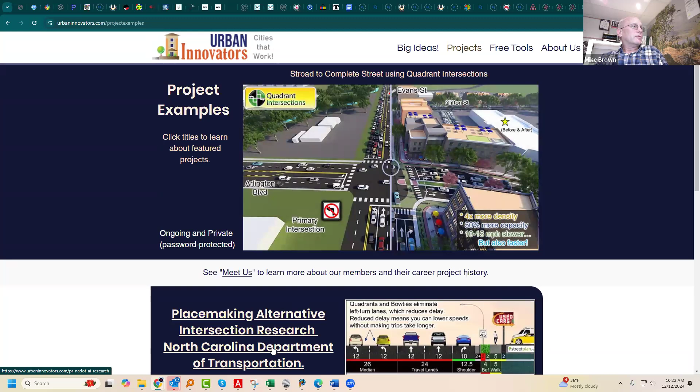Then I'll just carry on. I've got this stored on my website, urbaninnovators.com, and I'll just go there. If I click the projects button, we're going to be here. A lot of these graphics are here that we're going to talk about today. If you wanted to go there on your own, you can do that too. Go there, and then there's this North Carolina project, and on that main page, right there, that's the graphic I wanted to show.

The phrase we coined was drive slower, travel faster. The idea being that if you're Bugs Bunny there in that red car, you got a fast car, a fast speed limit, but if you hit so many red lights, are you really moving very fast? In urban environments, if the speed limit is 45, you're probably driving 50 if not faster when it's wide open, but then you reach the signal and your average speeds might drop down to 15 or 20, even in the peak congested periods.

So the alternative intersections are so efficient because they reduce the number of phases. You can see on the left there that a 3-phase signal just means turning off one of the left turn movements, and a 2-phase is turning off both of them in the main intersection. By doing that, you get more green time, and with more green time, you can afford to reduce the speed limit.

In the research we just did for you guys, we tested some cases - what if we dropped the speed limit from 45 to 30, a 15-mile-an-hour drop? We measured that the average speeds over like a half a mile distance, maybe even more, truly did come out faster. So after we recovered so much green time, the average speed had increased, even though the cruise speed had decreased by 15 miles an hour.

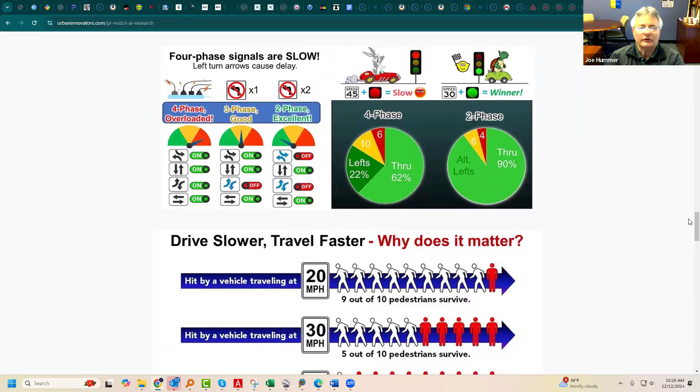Is it easy from this website here to show us a couple of the images of the particular designs? Yeah, I don't know which one you want to start with. First, maybe let's start with the U-turn if it's convenient for you. Yeah sure, so I'll go back to the top, and these 3 buttons here will get you to each of those.

But you know, most of us would think of U-turn in this state, we would call it an RCI, as a high-speed rural design. You need lots of space for the diameter of that U-turn. It's tough to find that kind of space, especially in the kind of stroad environment that you're talking about. So the main question to me is how do you end up fitting U-turns into urban areas? Yeah.

Well, it depends on how you think of finding space, I guess, because sure, the U-turn may not exist or be possible within the current right-of-way footprint. Suburban areas aren't like busy downtowns where the buildings are right up against the sidewalk. The buildings are usually 40 feet away from the sidewalk, maybe more. So you're going to impact private property usually when you try to identify where you're going to put a U-turn, but it's probably parking lots or landscaping or something like that.

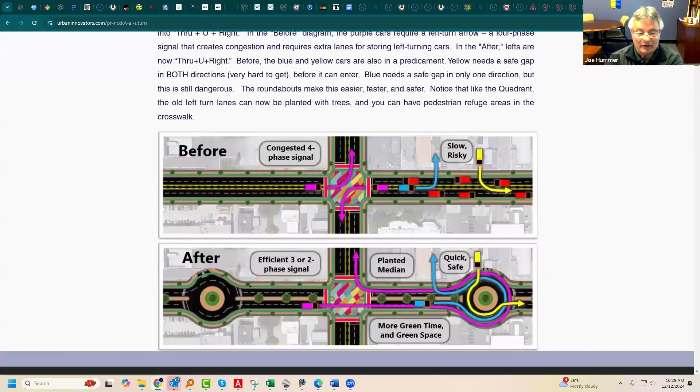Show us an image. What does that end up looking like? Sure. Well, there are so many different U-turn designs, and this first one just leverages roundabouts, and it's different because we think of roundabouts as being directly in an intersection, but they don't have to be. They can be off to the sides. And if they are off to the sides, then there's a lot of virtue that can happen.

So you see right there, the purple cars are requiring a dedicated phase, but with the roundabouts, you can reroute and get rid of that phase. You go through the intersection, make a U-turn, and make a right. That's basically the RCI or R-cut movement, but using a roundabout to do it.

What's cool about this is it's not only useful for the phase reduction, but it makes things safer for the blue car that otherwise has to take risky gaps, and the yellow car, which has to take even more risky gaps. Especially the yellow one. Yeah. So even if you didn't introduce these U-turns for the sake of improving left turn efficiency and getting rid of phases, doing this will make a raised median corridor a lot more navigable and a lot safer. So that alone is a good enough reason to do it.

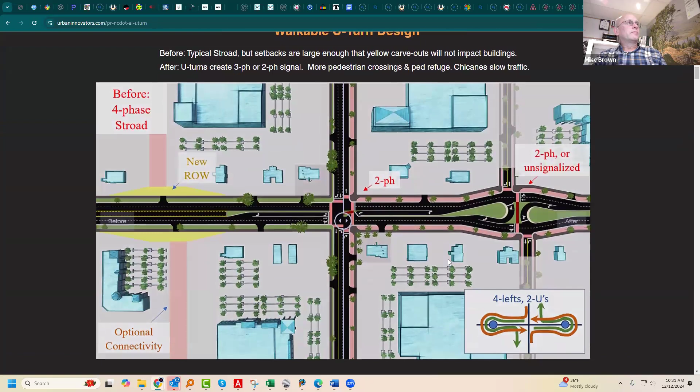So here's one that's a fun comparison. This is just looking at a typical stroad, east-west and north-south, kind of looks like a stroad, but it's meant to be a smaller connector. We just drew a really long right turn lane and a really long left turn lane, but it doesn't have to be like that. Just looking at it, this is how I spot for opportunities in stroad environments to do things like this. That yellow space is what I need to make this work.

And so when you roll that out, this is the design concept we came up with. This is a lot like the R-Cut, but instead of a typical loon design, it actually flares out the main lanes and creates a teardrop type of shape in the middle.

What's useful about that is it forces a slowdown on the main line. That's one of the good things about it. Another thing is it creates a rather large pedestrian island there, giving you a two-stage crossing that's really pretty convenient. I think that's a very helpful thing.

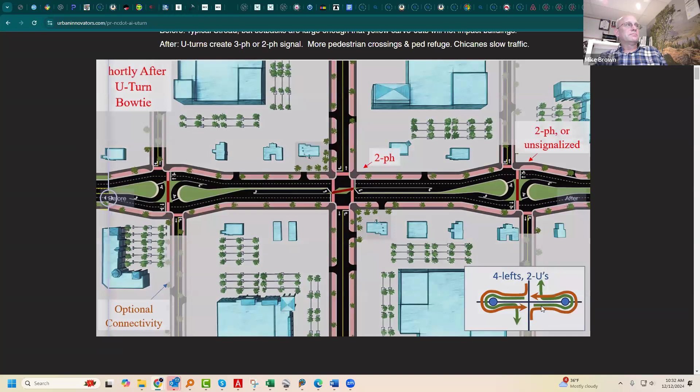And then if we go to the next image, this shows what it looks like on opening day. You haven't transformed anything drastically—you've just made a nicer environment with more street trees and traffic calming strategies.

Maybe you've certainly reduced the lane widths from 12 feet to something lower than that. I love 10 foot. I far prefer 10 foot over 11 because the goal is to slow things down, and you just don't slow things down enough when you're at 11. You've got to make drivers feel like it's tight. Good point. Yep.

And so after you let this season for a while and the market gets a chance to react to the infrastructure that you've laid down, then you're going to get mixed use development showing up. Now, of course, that's only true if the city has encouraged mixed use development here at this site. You've got to have both elements. You've got to have the infrastructure and you've got to have the permission. But that's, I think, a really great illustration of what can happen over time.

Got a question that came in the Q&A from Michael. Thanks, Michael. Many of the intersection designs that reroute left turning vehicles increase the volume of right turning vehicles at the main intersection. This could lead to increased conflicts with crossing pedestrians and the need for LPI or exclusive pedestrian phases, with the additional time in the cycle canceling out most of the operational benefit of the intersection design.

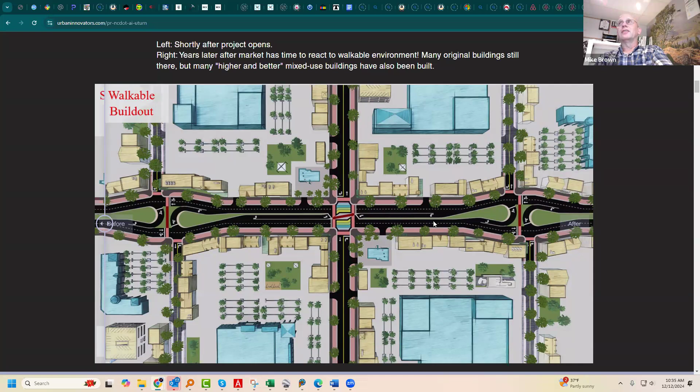I think at least in the beginning, it's less of an issue. There's not that many pedestrians. When you start out in this world, on ribbon cutting day, there's no pedestrians there. It's going to work real well. Over time, there are more pedestrians. And so maybe you've got to figure out what you're going to do now that there's a lot more people showing up. Have you got any thoughts on that?

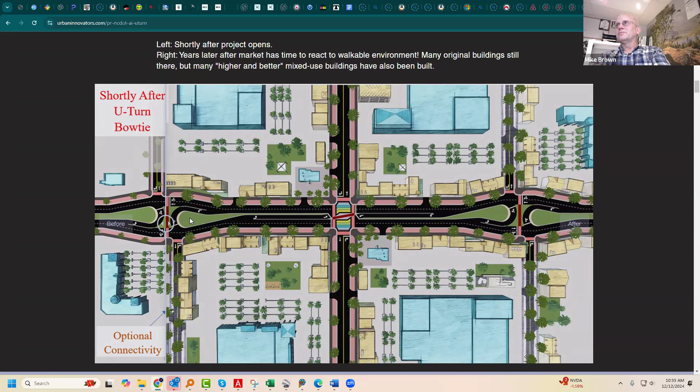Well, a lot of the pedestrians go to the mid-block crossings that are really excellent, I think. Yeah, you still have some at the main intersection, but we've got those two mid-block crossings that didn't exist before, right? Yeah.

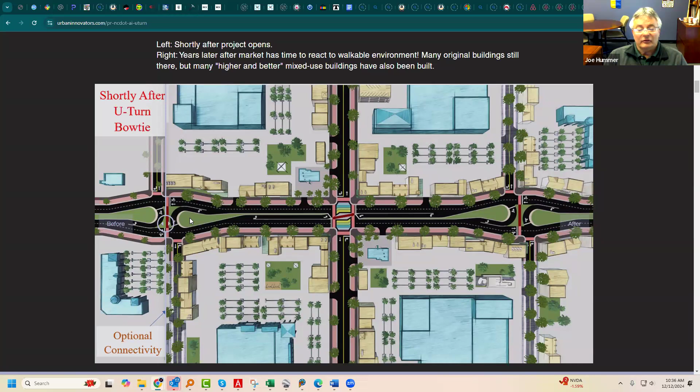Let's move on to show quadrant design. Okay, we've got a U-turn corridor there. That's cool. But make sure we've got enough time. Oh yeah, we are, kind of, for the other designs too. So, well, I'll just scan through these real quickly. I know everybody's probably doing all that, but give me one more minute on this.

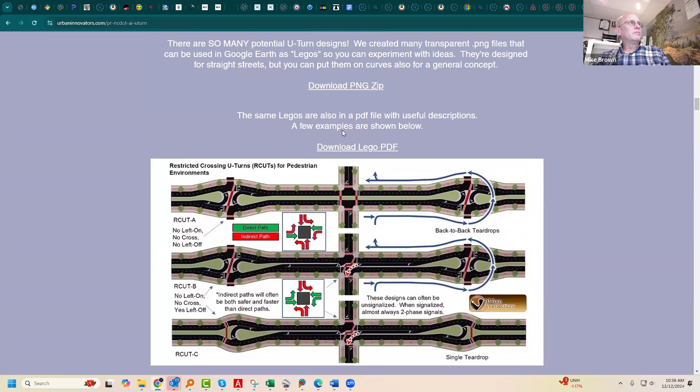Okay. So one of the things that we did was we created a bunch of transparent PNG files that you could put onto Google Earth or something, just to conceptually start thinking about what are your options in this space, and are they even remotely practical? So I think that's pretty cool, and there's some zip files and a PDF file you can download to get these design concepts and bring them in.

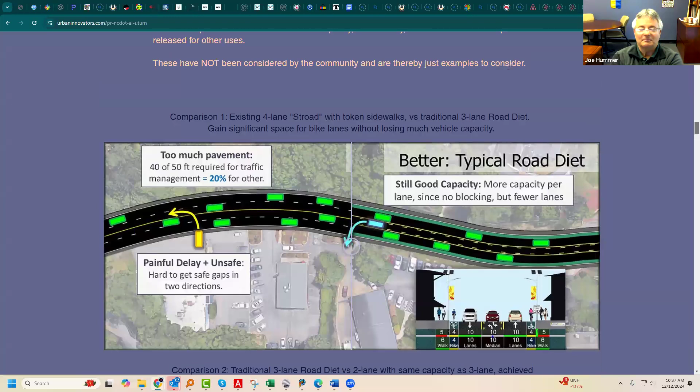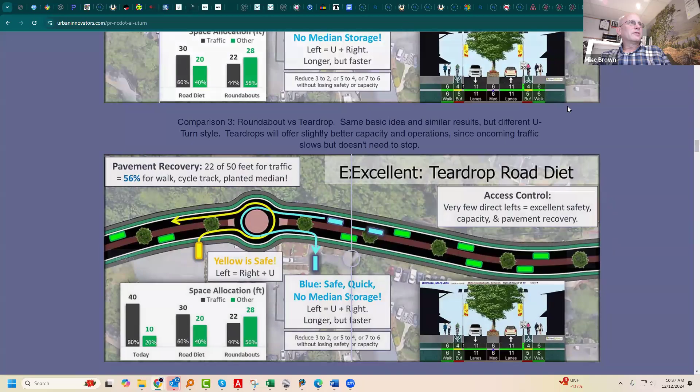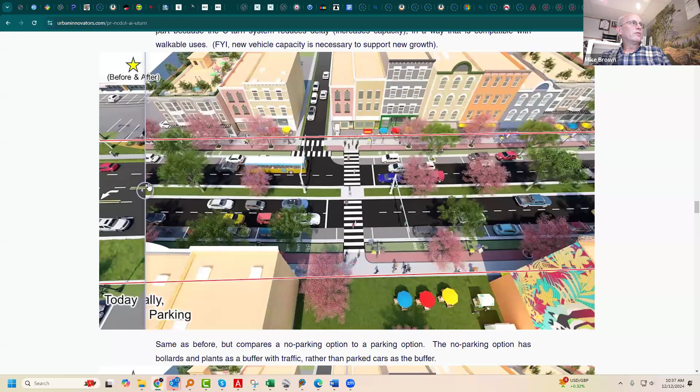Here's an interesting one about road diets, how you can use roundabouts to get an even tighter road diet than we have ever done before. So I encourage everybody to read through that little story there. And here's some photorealistic renderings of U-turn environments that we created. And is that it? Yeah, go ahead and just look through that on your own.

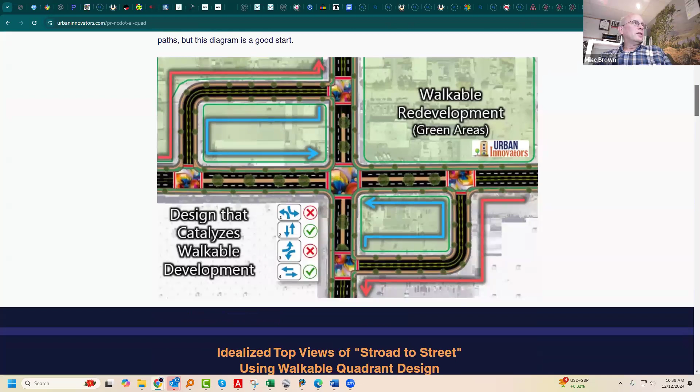So quadrant, we were going to go there, right? Yep. Okay. So that's one concept for quadrant. Here's another one that's a lot like the one that I just showed. So you're rerouting the left turns onto a connecting roadway. Yes, and it's possible to do it with a single. You can route all four lefts on a single quadrant.

I think that's helpful for a traffic engineering solution, but for a placemaking solution, I would really try to do at least two and do them in this format, where it's kitty corner like that. And the reason for that is it improves driver expectancy, that what you see in either direction is kind of the same thing.

If you can also just use this to get to 3-phase efficiency. So if you don't want to introduce the out of direction travel, if that's a bridge too far, a pill too bitter to swallow, then say, all right, well, then we'll route them on the red one. There's no out of direction traffic there.

But the nice thing is it's kind of a get out of jail free card, that if things get bad enough and people say, what else can you do? You say, well, we can route them on the blue path. So then you go ahead and do that. But watch what this does for transforming a stroad.

So if we swipe this around and look at what we've done, we don't have the double left turns there to serve anymore. There's still a left turn, but it might not need to be a double. It might be a single back here further where it can get more green time. You got pedestrian refuge in the center of the crosswalk, planted median all the way across.

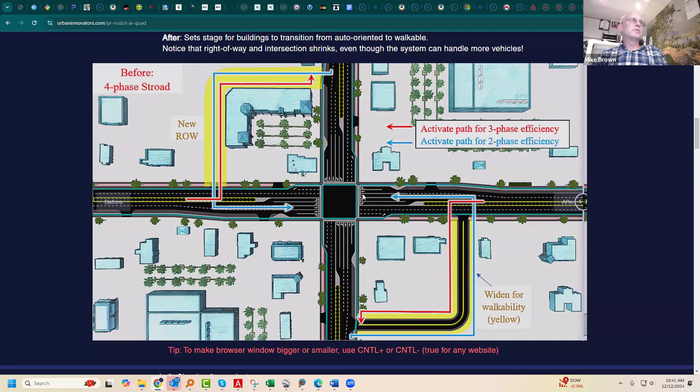And yeah, it's going to require acquisition of property, and it's a little bit spendy and controversial perhaps, and the business owners are going to wonder, what am I getting out of this if I cooperate? But when you say what you're going to get out of this is an awesome road that gives you backside access to parking, and then you come down here and say, it may not take very long, and your property is hugely more valuable than it was before, then I think that the property owners in this area are going to say, how quickly can we give you the land that you need to make this happen?

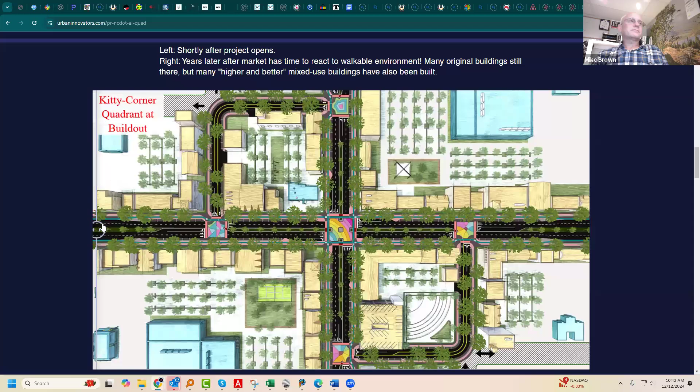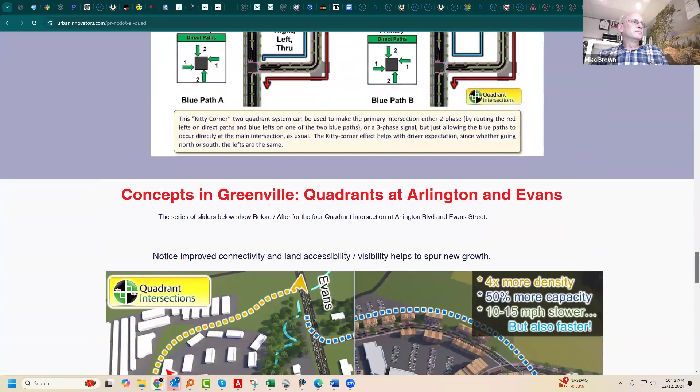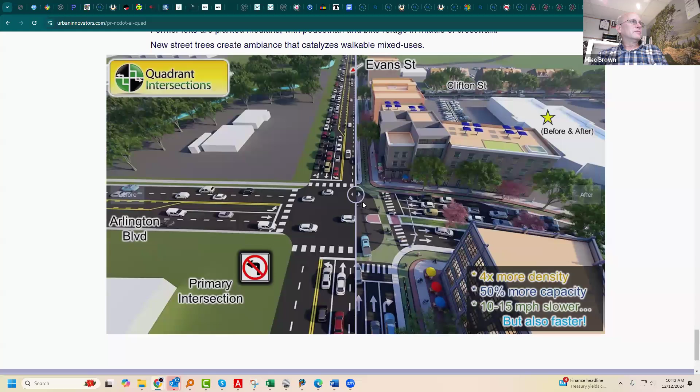So same thing, we've got those Legos here, the quadrant Legos, some diagrams that talk about the different ways you can operate it and what it all means. We went through Greenville. Oh, one of the things I wanted to point out. Yeah. So when you think about how expensive it is, you look at that and you say, okay, that's affordable. You look at this and you go, oh, that's not affordable. We'll never be able to build this as a DOT.

But the argument that I want to make is what we've successfully done by creating this type of environment is, for one, we've improved our capacity by more than 50% in the measure that throughput capacity for cars is a lot higher. But the ability to support development is 4 times higher, or in this case, we can support 4 times as much development as we could previously.

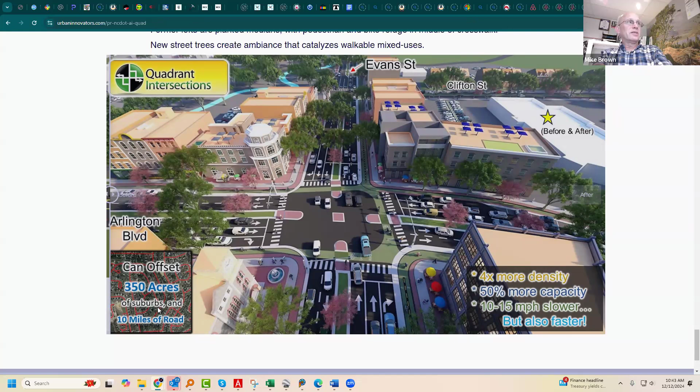And so that means that if we were to densify this area, then it offsets development kind of randomly across the suburbs to about 350 acres and roughly 10 miles of suburban road, just cul-de-sacs and whatever else, and new stroads and all of that. So in aggregate, we've saved money. So this thing was expensive on opening day, but by the time all of this development comes along, we've saved a ton of money because we didn't have to build infrastructure elsewhere.

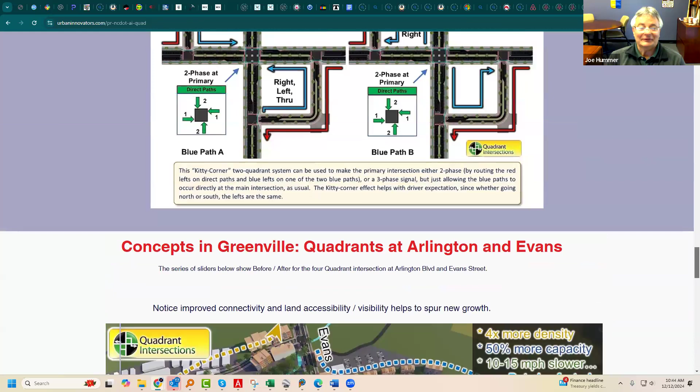Yeah, I wish there was an easy way to account for that. Luckily, I'm not an accountant and you aren't either, but how to pay for these projects and how to realize those returns is a whole other topic.

Mike, we got a good question in from Ann, one of our champions out there. And she asked, are there some real world examples that we can go look at in Google Maps where you've seen the land use respond positively to these kinds of changes?

There are a lot of such places that have responded to complete streets in general and have responded to the transformation of stroad to street. But there's not many examples that I'm aware of where it's responded to placemaking alternative intersections, because that's a new idea that hasn't really happened yet.

With one-ways, there are some. In fact, let me go there. The town center in California is one. So this spot right here is a really good one. This is in San Marcos, California, and it was designed this way from the beginning.

So in some ways, it's not looking at how the market would react to a retrofit. But I think it's kind of similar in a lot of ways, because the market definitely reacted to what was on the ground in the first place. This picture doesn't show what it's like, you can go there on Google Earth and look at it, but they've built a lot of pretty tall stuff, wall to wall, 3-story, successful shops on the street.

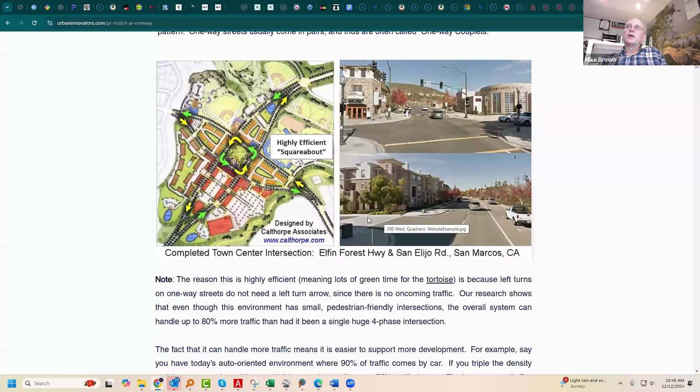That's a good segue into the final of the 3 design concepts, and that's the one-way pair, or what they're calling here town center intersection, and it is a great way to create a walkable town center type activity center from what was otherwise going to become two stroads. And so it's not easy in a retrofit to find the parallel road that you're going to do this on.

So one of the things that I love to point out is, hey, it's the suburbs. There are hardly any buildings anywhere. Just get creative and think about the parking lot. So when I look at this, I think, okay, as a traffic engineer, what am I trying to do? I'm trying to reduce phases and improve efficiency. And one of the ways I can do that is just breaking out the westbound movement to another spot. And I got a mostly empty parking lot.

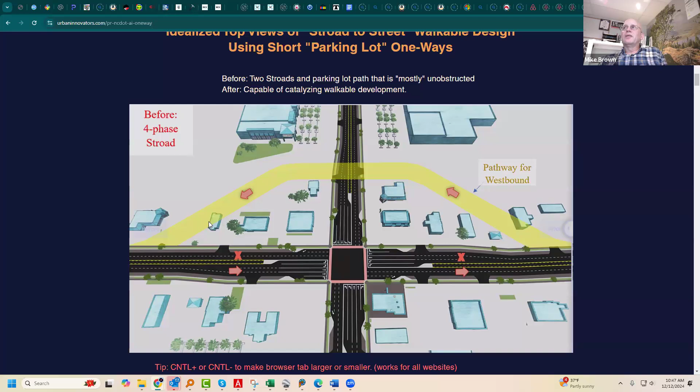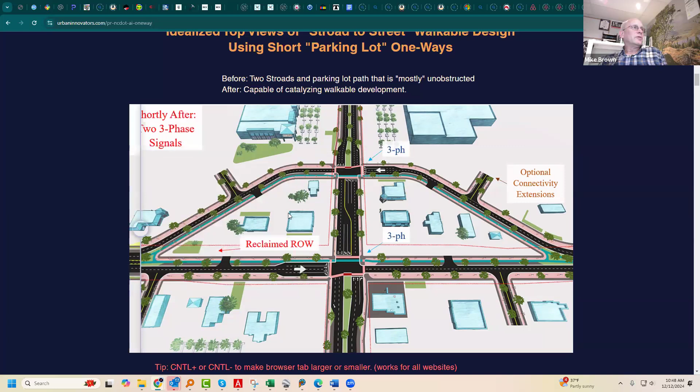It's not totally empty. I'm probably going to have to hit this building here, and this building here. And that can feel like a showstopper, but I don't know that it needs to be. Because if we work with the city and work with the developer, the owners, and compensate the ones that we're going to hit fairly and make it worth their while to work with us, then we can get that environment that improves the traffic flow a lot, and over time it's going to become like this.

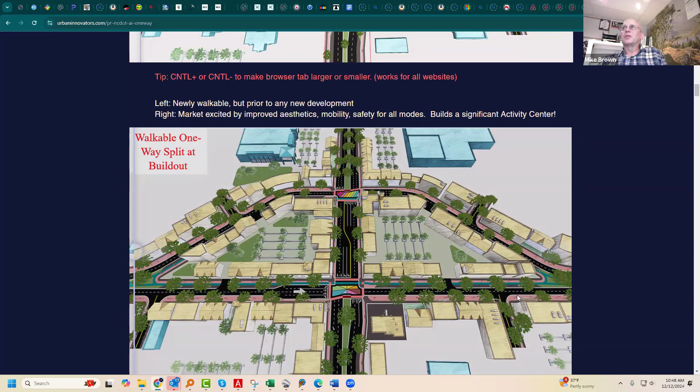So when you say, okay, the amount of economic development that can occur around this so overwhelms the value of the little tire store that we had to take, then it's worth it, and we should find a way to raise the money to pay that guy what he needs to move his tire business somewhere else, and move on. So that's one of the real beauties about the one-ways.

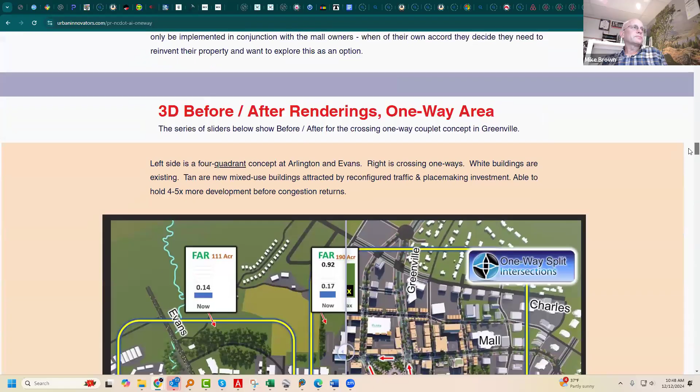So what DOTs will sometimes do is they'll say, well, we can't tolerate that 4-lane situation anymore, so we're going to have to go to a 5-lane and get rid of your parking, but we'll put a street tree in the median and try to make it pretty. All right, that's okay, but your speed is still going to be difficult to control. You might still have it signed at 35 and people are going to drive 42, 45, because they don't feel like there's any reason not to. They're not going to get a ticket at 42, so why not?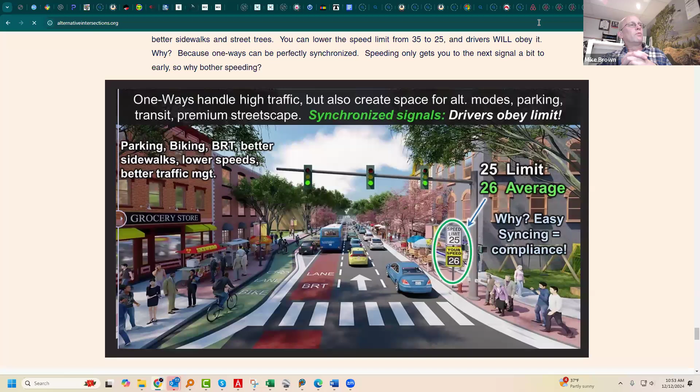Well, let me point out to y'all that one of the things you can do: I built a website a long time ago called alternativeintersections.org, and it's a wiki site where you can go in and load the alternative intersection locations you're aware of. So this would be a really good one for somebody to go in there, create a little login account, zoom in on where this is and tell us a little bit about it. I would love that if all of you would go start loading up the cool spots around North Carolina. I wouldn't put every single R-cut that exists, but if there's some pretty interesting ones, then load those in.

Paul from CDOT, I think that's Charlotte DOT: do you have examples of traditional capacity expansion projects that have negative land development responses? So that's kind of the opposite of the question Ann asked before, but it's a really good question. We widen the road and the businesses close, right? I got a great one.